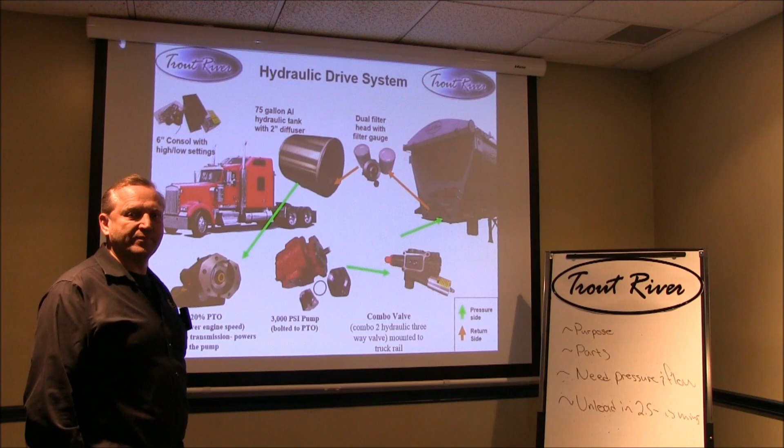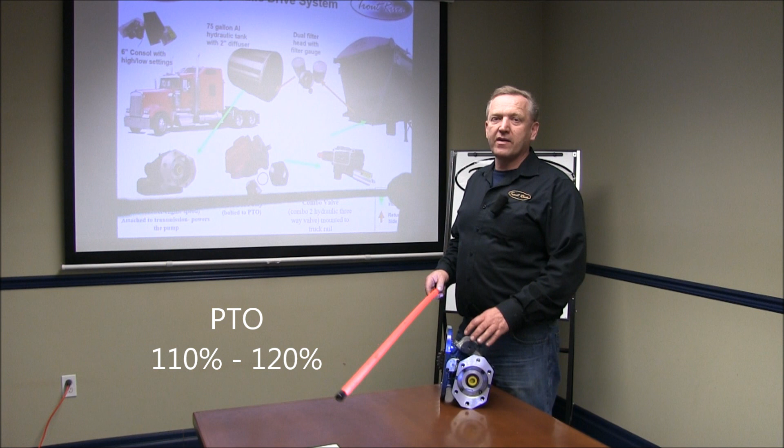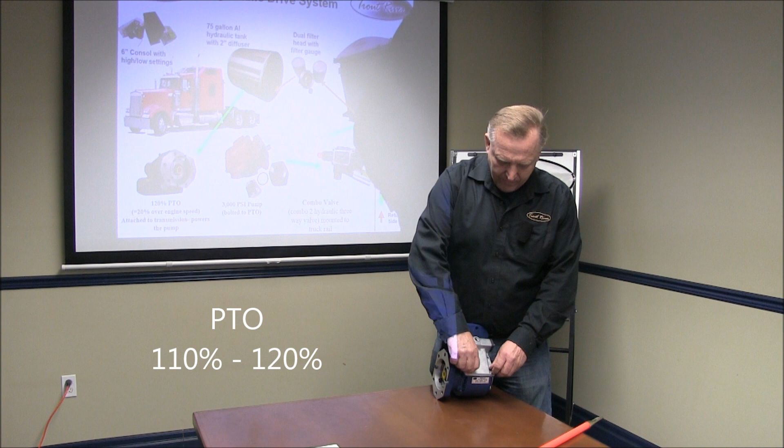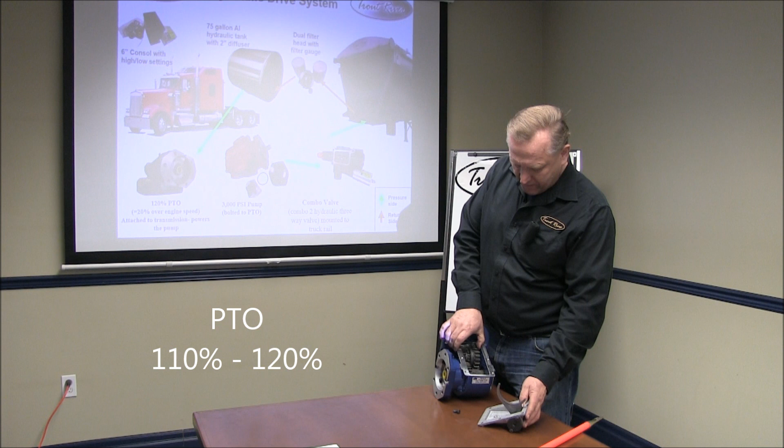The first thing I'd like to start with is the PTO, better known as the power takeoff. It mounts to the bottom of the transmission. It's very important to have it spec'd right, because we like to run that around 110 to 120%, since the bulk of hydraulic pumps are designed to turn at 1,000 RPM. The PTO matches into the bottom of the transmission and drives off this gear. That gear runs free until you shift the switch in the dash of your truck to put the PTO in gear. Then pressure comes in here, pushes that gear sideways, locks the gears together, and the transmission is tied to the pump, turning it to drive it.

Now here we have a 3,000 PSI gear-driven pump designed to give us maximum flow and pressure. As you can see, it mounts directly to the PTO. You can orient it any way you want. Your pressure side is here, and the suction side is here.

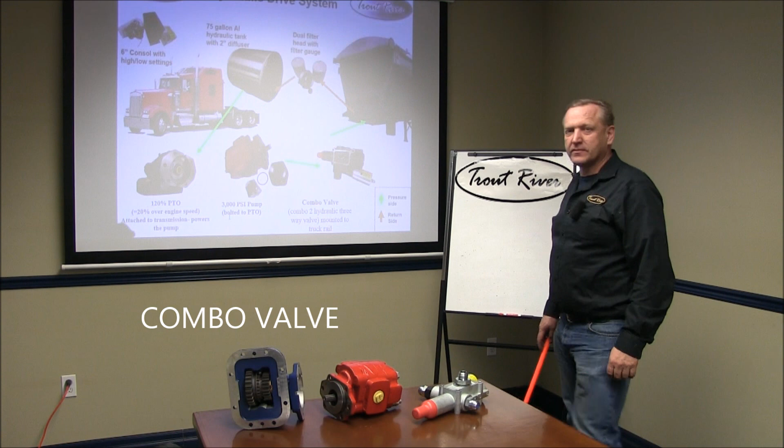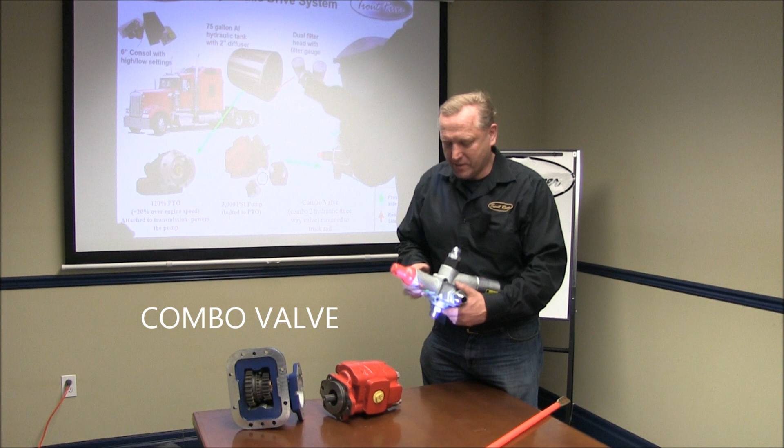We've just gone over the PTO and the pump, and now we're going to go to the combo valve. The combo valve is kind of the fuse in the system. If something is jammed or overloaded, the relief valve will kick in and tell it there's something wrong. Plus, you'll be able to use this for other pieces of equipment in the yard, because it's got a 2,800 PSI relief valve on one side and a 2,000 PSI on the other, so you can run it on all your other pieces of equipment.

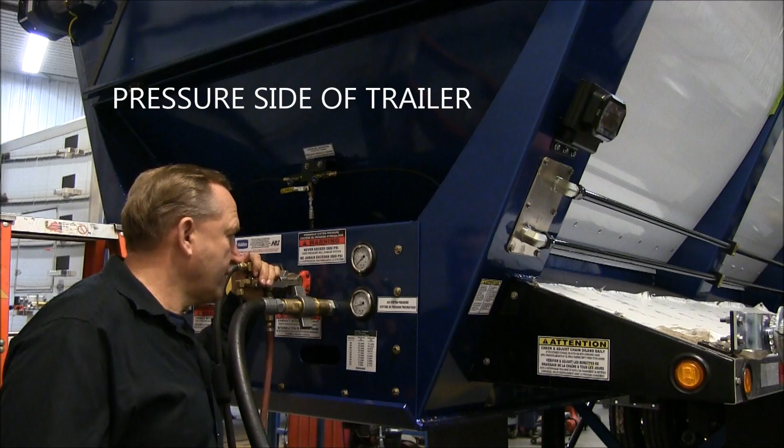As you can see with the combo valve, the pressure line comes up here, goes in here, goes to the gauge to give us pressure, and then it goes out to the top line to go to the back of the trailer to drive the motor.

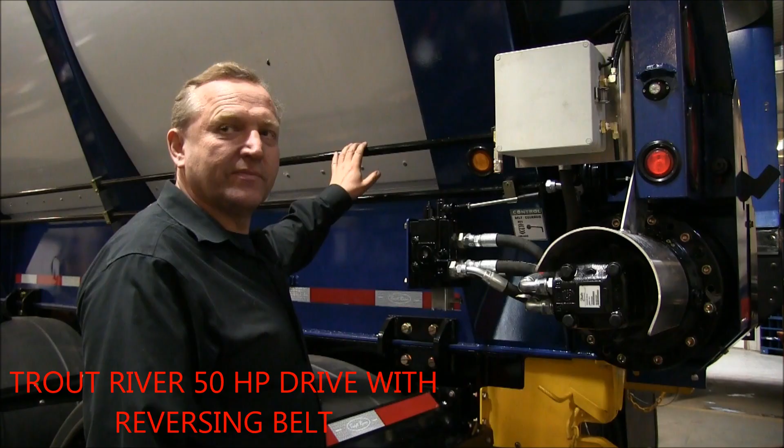Now at the back of the trailer, the flow comes back here at 2,800 PSI, 28 gallons a minute, flows into the valve body, and when you engage the trailer to go, that pushes the oil out here. That 50 horsepower is developed right now to go to the drive system, and the oil comes out and returns back. The big thing about our trailer is we can put it in reverse, so when we put the valve back this way, it reverses the flow of oil and reverses the belt to bring the load back in.

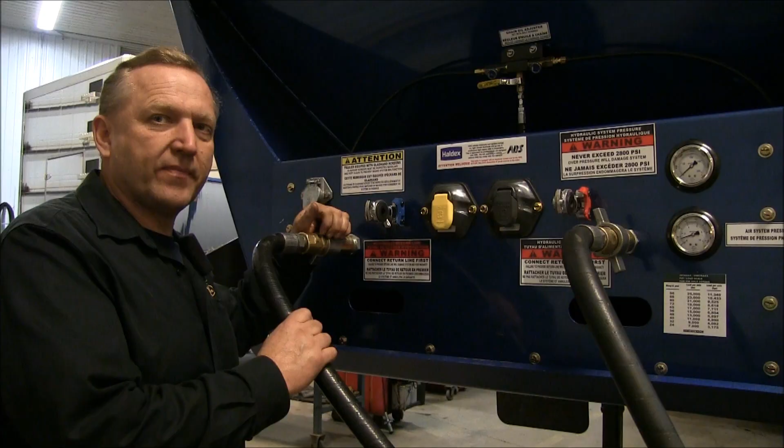Now back at the front of the trailer, this is where the oil exits the trailer, going back to return to the tank and the filtration system.

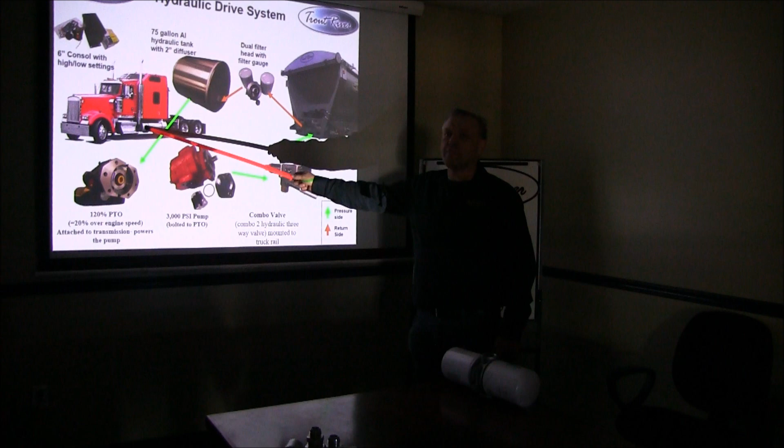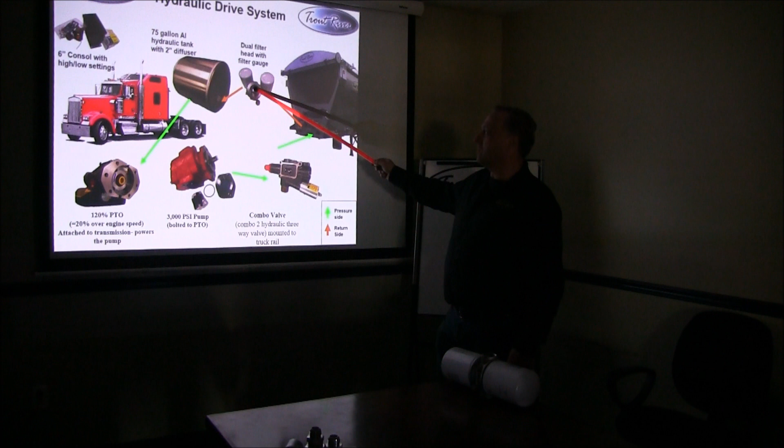To recap, here we are at the transmission where we get the power from. It goes to the PTO, which runs at 120%. We go to the pump, which runs at 3,000 PSI at 28 gallons a minute to get our max. Then it goes to the combo valve, then to the trailer, through the trailer. On the return, oil is coming back, and we do filtration here. Filtration consists of 2 filters, which gives it very high flow so it doesn't restrict anything on the return side.

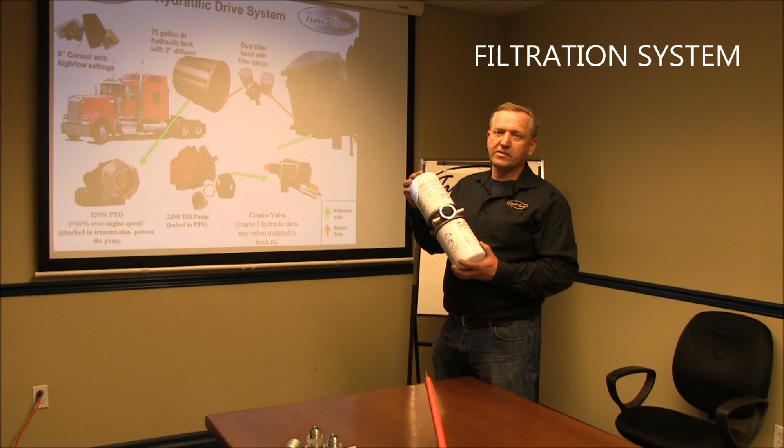From the filter, we go into the bottom of a 75-gallon aluminum tank into what we call a diffuser. The diffuser throws the oil all around the tank inside to dissipate heat through the aluminum. Then we just start the cycle all over again.

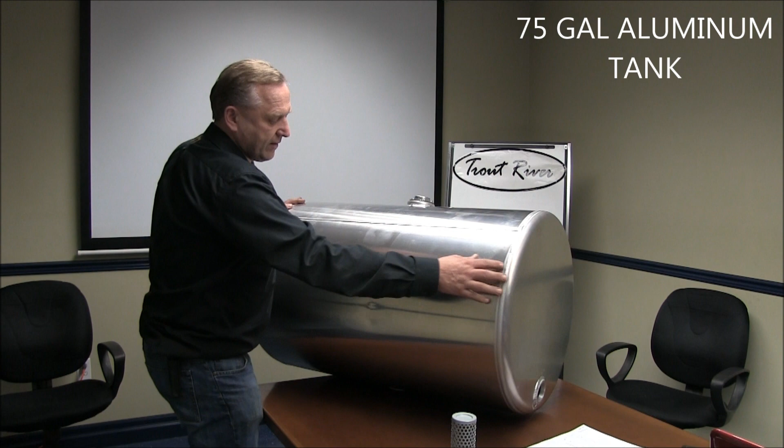We go into a 2-inch suction. The suction goes from here right directly up to the pump. I like to keep it within 6 feet to increase the flow of oil so you don't starve the pump.

Hoses and fittings are very important. This pump is spec'd for a 2-inch suction, which gives it lots of flow. On the return and pressure side, coming from the trailer, we should use 1-inch hose. And when it comes to fittings, use a nice long sweeping 90, not the short ones. It just creates much better flow.

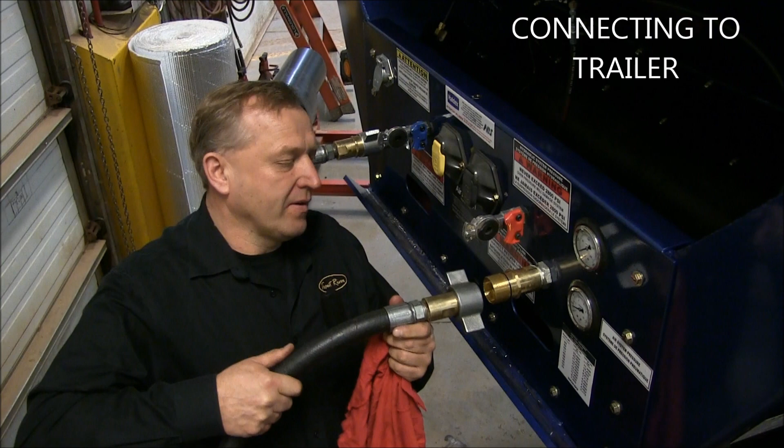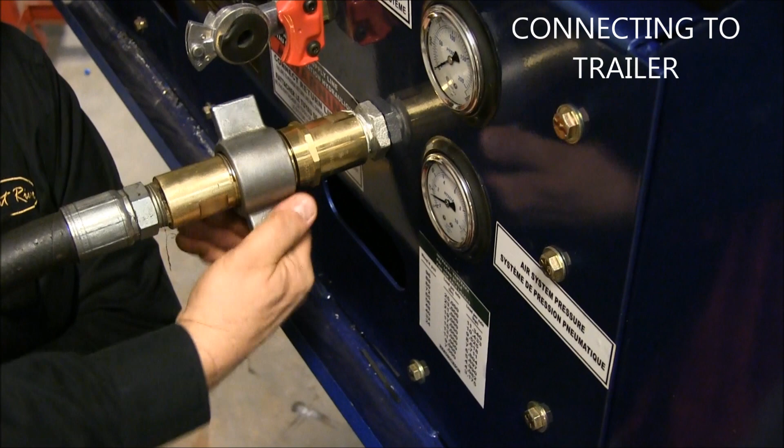The connection between the truck and the trailer is extremely important, because this is what transfers the power to the trailer from the pump. That connection should be cleaned, making sure there's no dirt, because that would transfer right into the system. Put the connection on, make sure it's nice and square, and then you tighten it up. There's an indicator right here that should cover over. Now you're starting, you'll feel the weight come onto the fitting, and that's when it's opening it up to allow the flow to go through. Make sure it's tight on both sides.

The best way to understand the hydraulic system on your truck is to purchase a flow meter. Then you could see that it's producing 2,800 psi and a minimum of 28 gallons a minute.

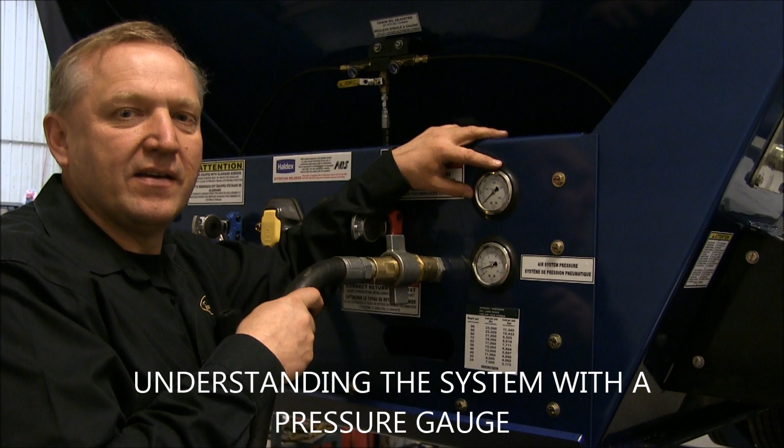Trout River puts a hydraulic pressure gauge on every trailer. It helps the customer understand how the system works. When it's sitting there idling, it should be running between 500 and 600 psi. When you go to offload, it should spike to 2,800 and drop very quickly back to about 1,200 to 1,400.

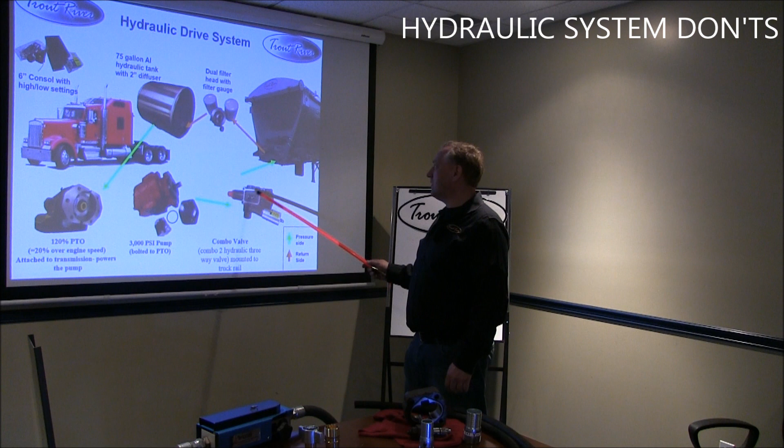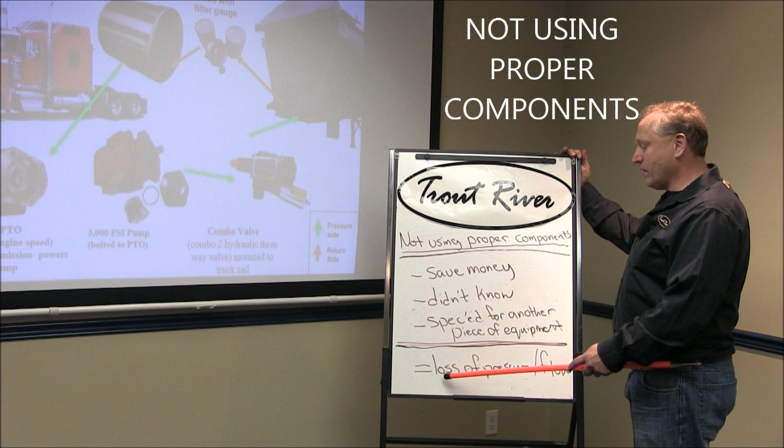Now that we understand pressure and flow and we've spec'd all the right components for this, we'll go to some of the issues that we've seen over the years. The number one issue I've seen is not using the proper components. Usually trying to save money, or you just didn't know, or the hydraulic system was spec'd for another piece of equipment. No matter what happens, it all adds up to loss of pressure and flow.

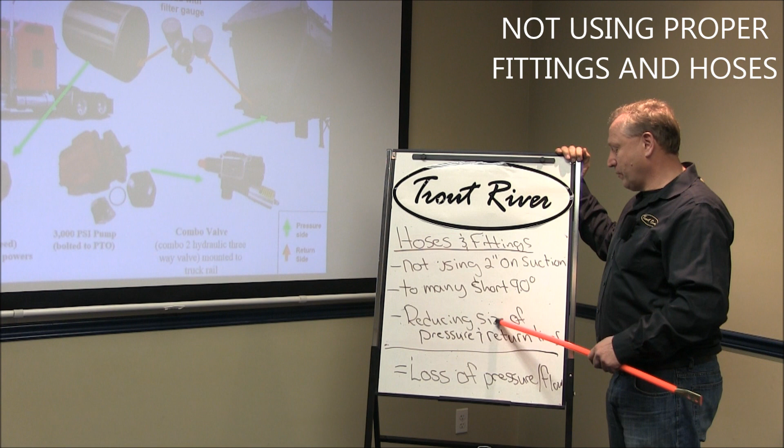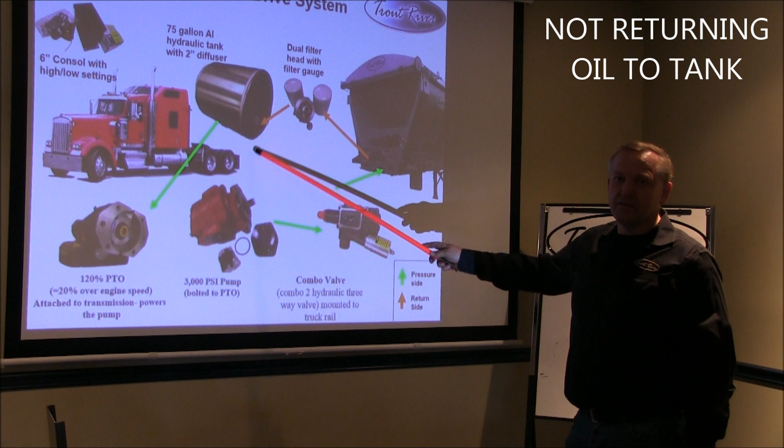The third problem we see is when oil is not returned to the bottom side of the tank, we always get excessive heat. That wears out all the components in the hydraulic system, and when that happens, we reduce pressure and flow.

The fourth issue I've seen over the years is not keeping the system clean. Whenever you go to hook up your truck, you have dirty connections. Those dirty connections should be cleaned and tidied up, because that introduces dirt to the system. That would turn around and prematurely wear pumps. Other pieces and particles will go into relief valves, and it all reduces pressure and flow.